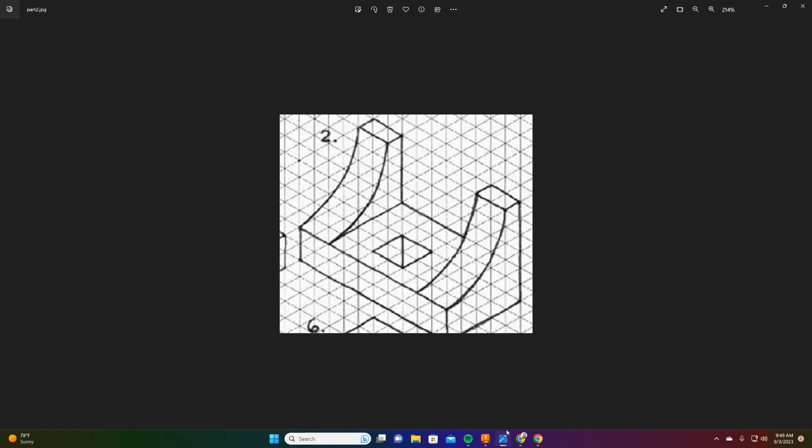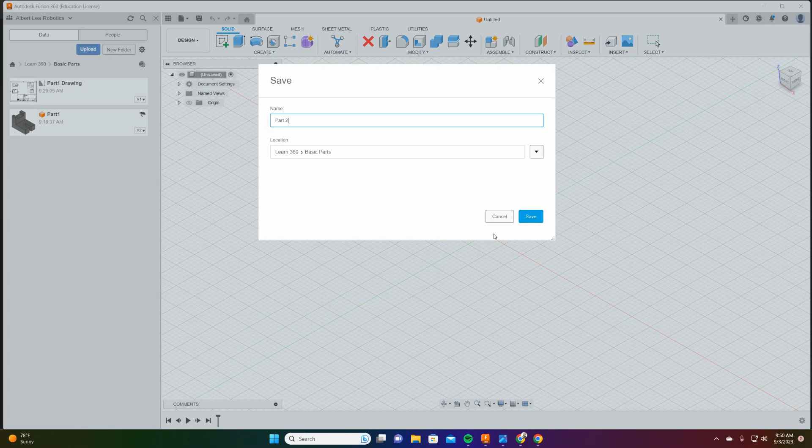So we're going to pop into Fusion 360. I'm at my home, so I'm going to go into my Learn 360, into my basic parts folder, and I'm going to make part number 2. The very first thing I want to do is save this, so I'm going to go to File and hit Save. We're going to call this Part 2, and save it into my basic parts folder. I'm going to hit Save - this is going to be part number 2 that I'm working on for my drawing.

I'm going to create a new component and call this component Part 2. So we've got this for part number 2, and I'll hit OK. This is going to be where we've got my Part 2 component.

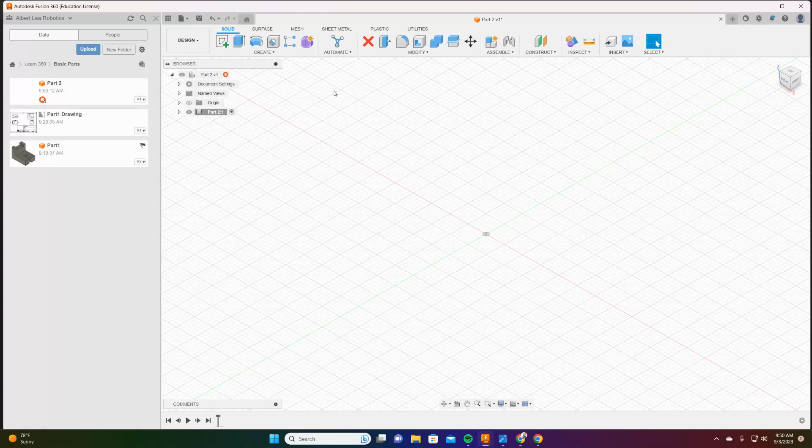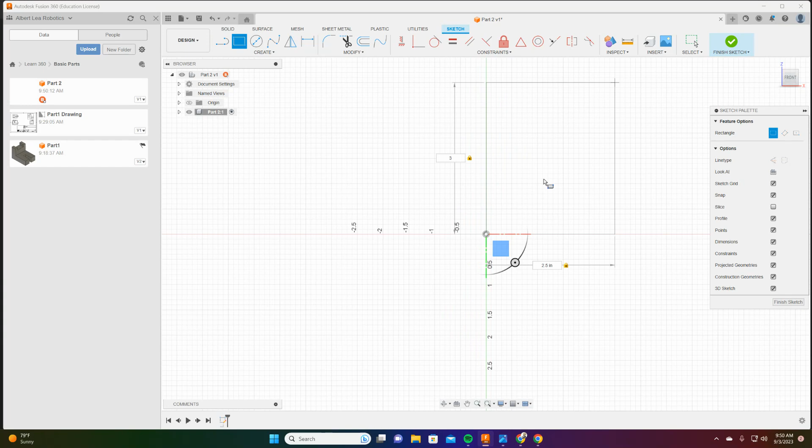So now with my part 2 component, I'm going to start to create my drawing for this. The very first thing I'm going to do is create my sketch. I'm going to put my sketch on the front again, and add in my rectangular drawing here, starting at my origin point. My width is going to be 2.5, and the height of it is going to be 3. So that's going to be my basic box there.

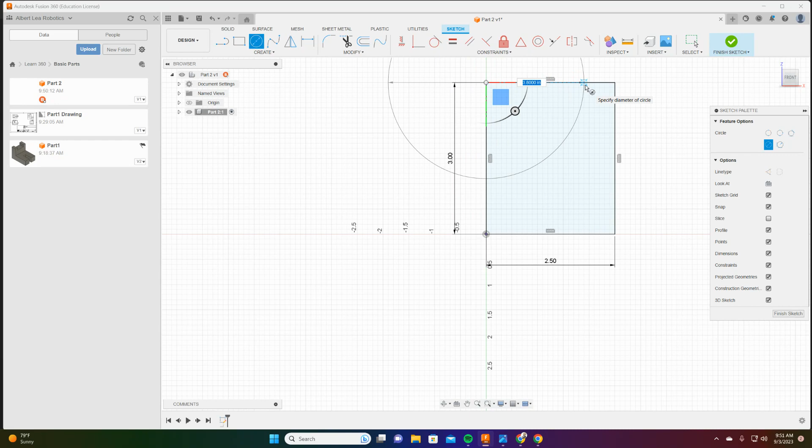Okay, now let's talk about how we take out that circular part. We're going to add our circle tool, and again I'm doing kind of the subtractive method, which seems pretty easy for this stuff. I'll go up to this front corner, go over along this line, and go 4 inches - that's going to give me my 4 inches. I'll hit the enter key, so that's where we're at with our drawing.

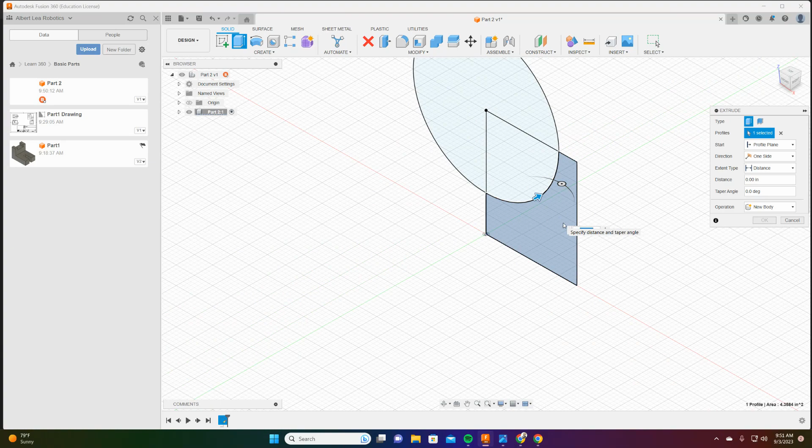So now I'm going to finish my sketch. Then I'll do my extrusion, or I can right click and do press pull to pick up my part. I'm going to extend this out 5 inches, getting it from the end here, and hit the enter key. Okay, so that's going to be our first section of our part. If I look at this, this is the first section of my model of what I've got for my part here.

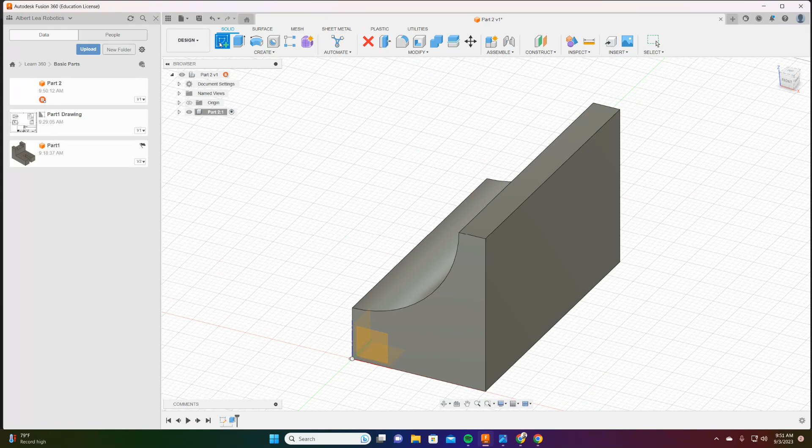Okay, so now what I can do is add a new sketch. I'm going to go to the back of this - we're going to cut out that back part. I'll go up here and add in a rectangular sketch right at the top. My dimensions for that rectangular sketch need to be - it's going to go half, so we're going to measure this here.

2 inches deep, so we're going to make this 2 inches deep. And then my width here is going to be, and I'm going to measure from the front of it. So I'm going to go 1/2 inch, 1, 1.5, 2, 2.5, 3. So it's going to be 3 inches.

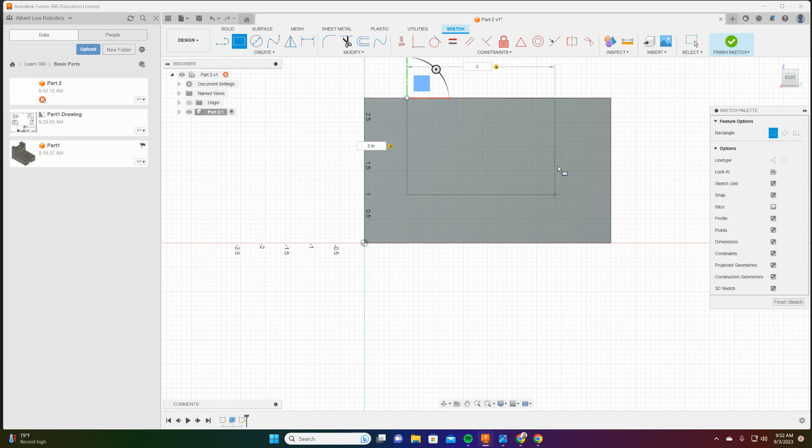I'm going to hit the enter key. Now I want to make sure that I dimension this out. So from one end, I measure that top here. I've got 1/2 inch, 1 inch. So it has to be 1 inch from the edge. So I'm going to dimension this piece right here.

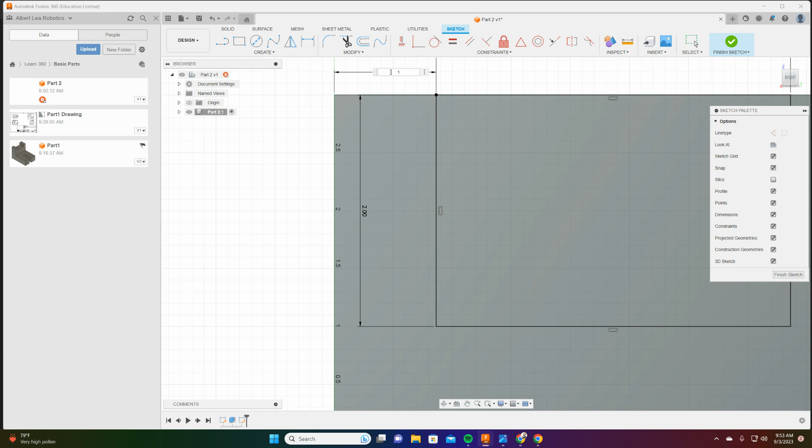I am going to dimension from this point to this point, and that is going to be 1 inch, right? So that's going to move my dimensions across here, so it's perfect.

So now what I'm going to do is finish the sketch. I can go back to my home so I can see it, and what I'm going to do is extrude this all the way through. So I'm changing up - you can do just the push-pull, but I'm going to do the extrude feature. Click on my face, I'm going to drag this through.

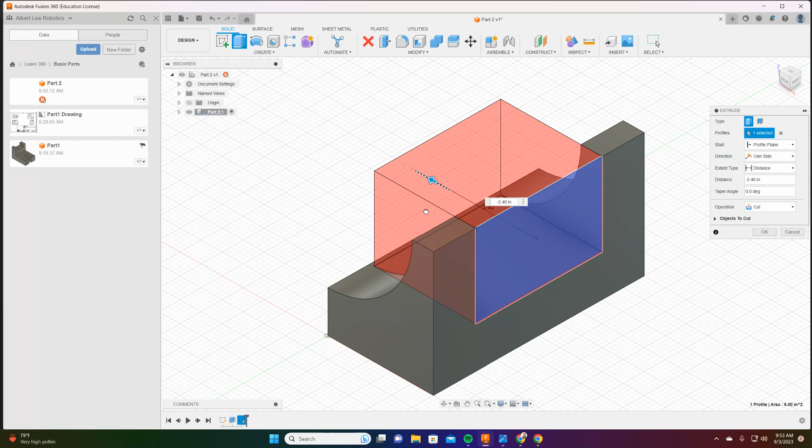Now you could drag it the entire dimensions, or I could just drag the piece that I want to get out. I want to take it for the full, just to make sure that I've got it. So I'm going to take that full 2.4 inches. I'm going to hit the enter key. So that's going to cut out my first part here.

And so if I orbit around, I can see it's starting to take shape with what we've got here. Now, last piece that we need to do is I need to cut out my square at the bottom, or in the center piece. So I'm going to add another sketch, put it on this front plane here.

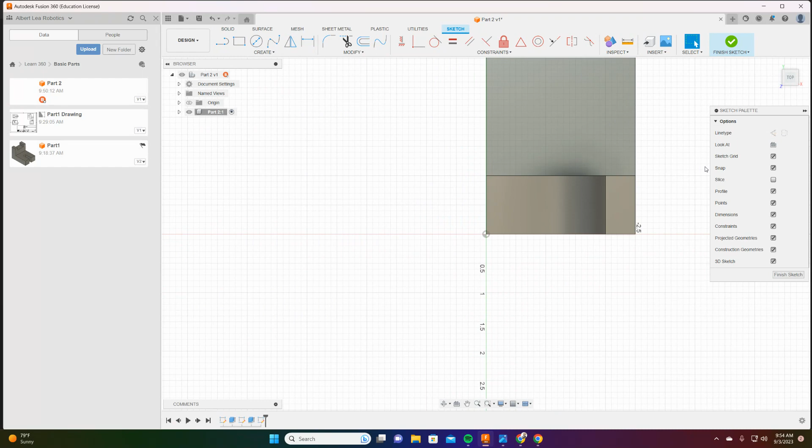I'm going to get it centered. I'm going to add my rectangular sketch. I'm just going to drop this kind of right in here. Now I know my sketch it's going to be 1 inch by 1 inch. So I'm going to make it 1 by 1. Okay, I'm going to hit the enter key. So there's my center sketch.

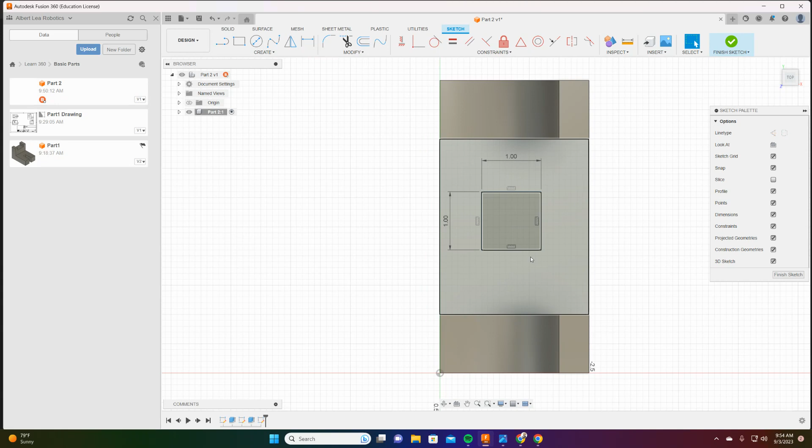Now I have to dimension it out. It's a 1/2 inch from the front. So I'm going to dimension this out from here to here is going to be a 1/2 inch, from there to there. And then from the bottom to the top is going to be 1/2 inch, 1 inch. So then from here to here is going to be 1 inch. So that's going to be where my square is.

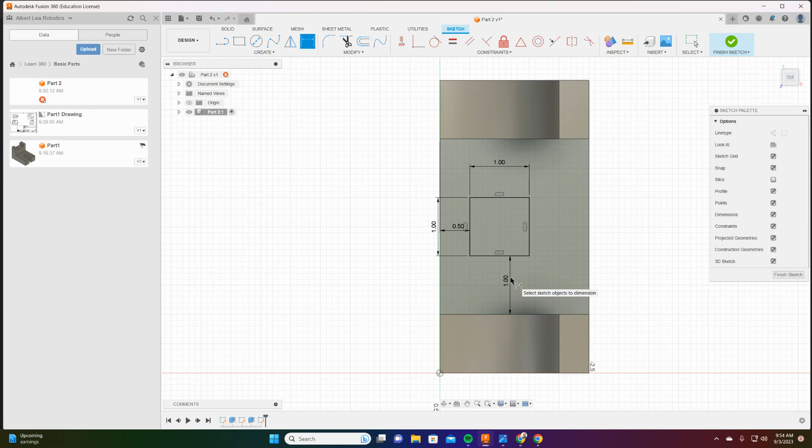And then I can finish my sketch. I'm going to right click on this. I'm going to press pull, pick the part that I want to pull. I'm going to pull it down. I want to make sure that I get it all the way down through the floor. Oh, and there it is. And so I hit OK.

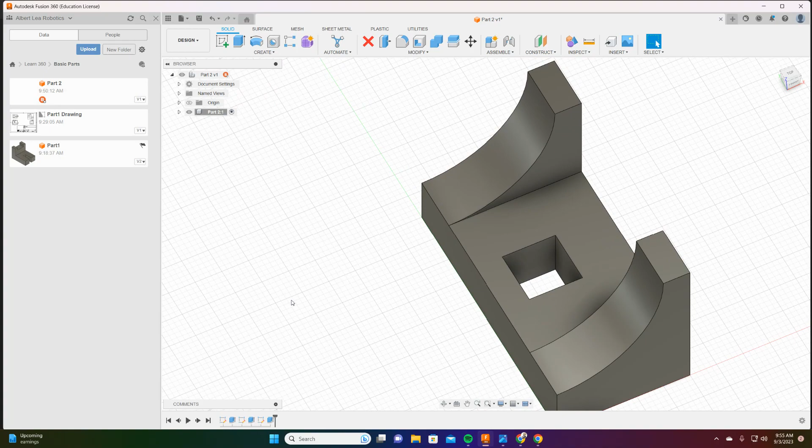And there's my part. So now I have got part number 2 has been completed. So we can rotate around it, and this would be part number 2 for us. So this would be what we've got for part 2.

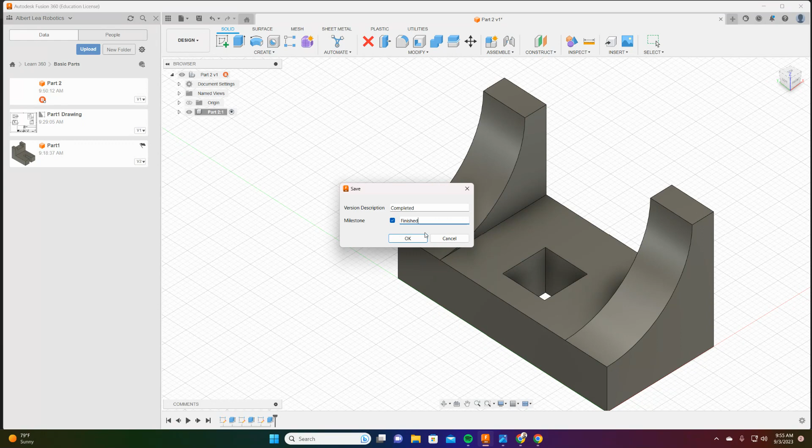So when I get done with this, I'm going to hit this save button again. I'm going to save this again as completed, so I've got this version, so it's going to be completed. I'm going to make this a milestone and make sure I've got it finished. Now your milestones can be anything - it can be the first time that you get something working, or you're putting your assemblies together, or whatever it is. So I'm going to make this a milestone. We'll talk more about our milestones. So there's going to be part number 2.